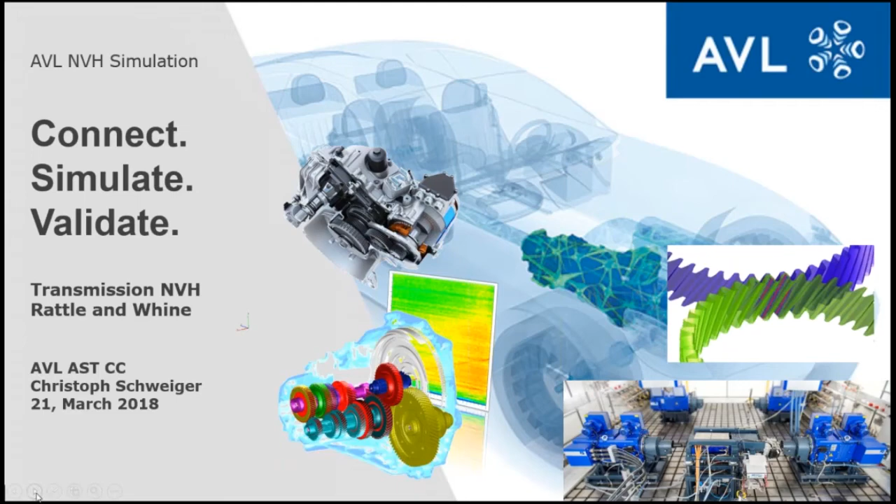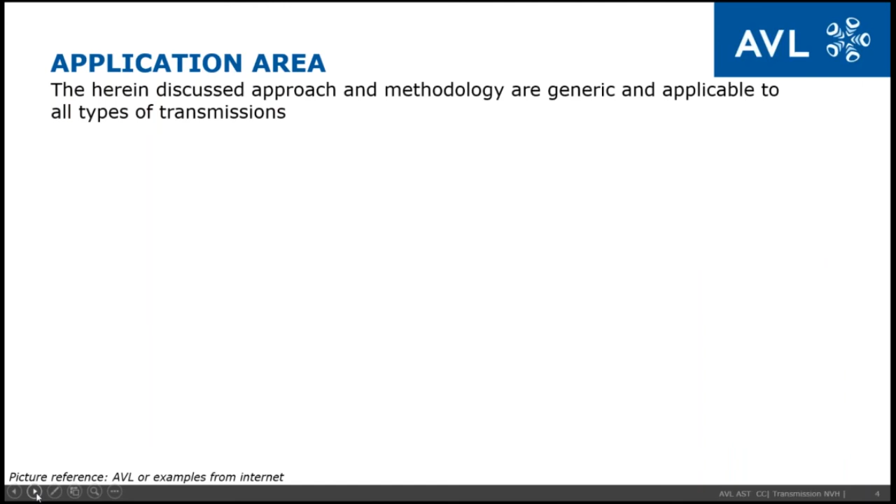Yeah, thank you very much, Gary. Very welcome to all of you participating in the webinar. The first topic, as Gary already said, will be about transmission NVH, where we especially focus on gear rattle and gear whine as one of the most important gear noises in transmissions.

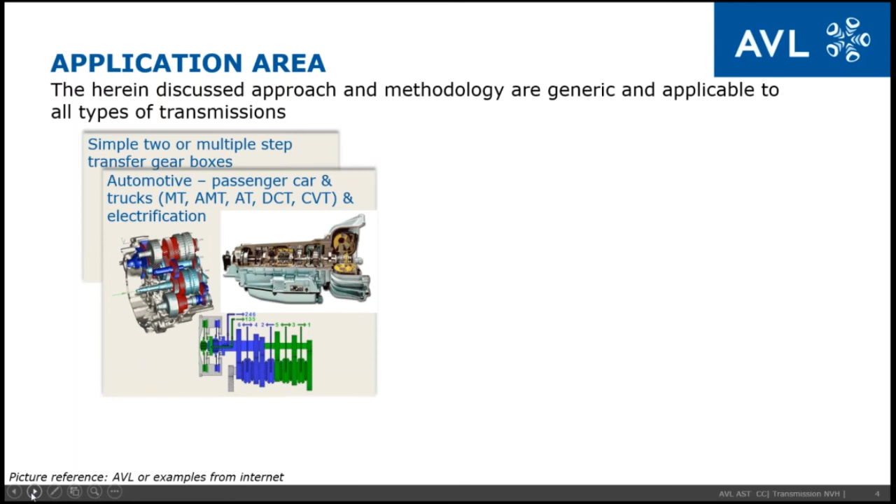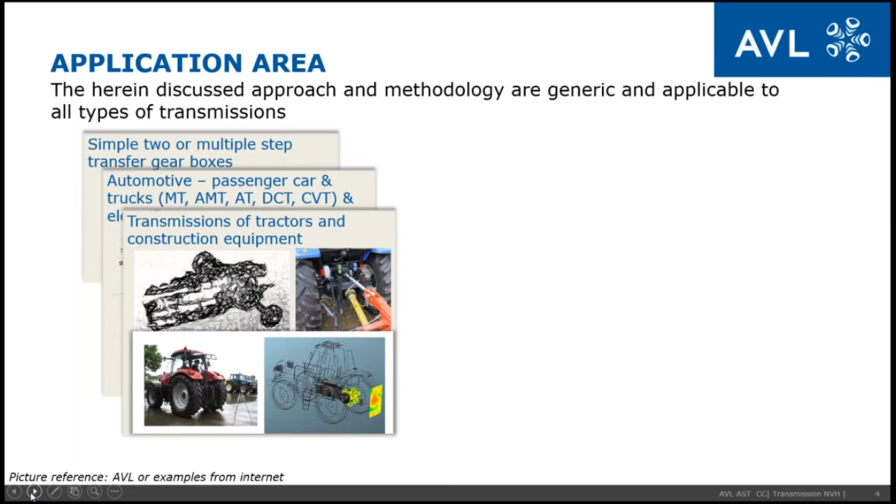First of all, I want to just sketch the application area, what we can use, what we can deal with. It depends - we have one methodology which can be applied to different types of transmissions. This can be rather simple transmissions, automotive transmissions for sure. It can be manual transmission, automatic transmission, double clutch transmission, continuously variable transmissions.

And for sure, electrification as well is also important. Challenging transmissions - tractor transmissions are probably one of the most complex transmissions, which we can deal with as well.

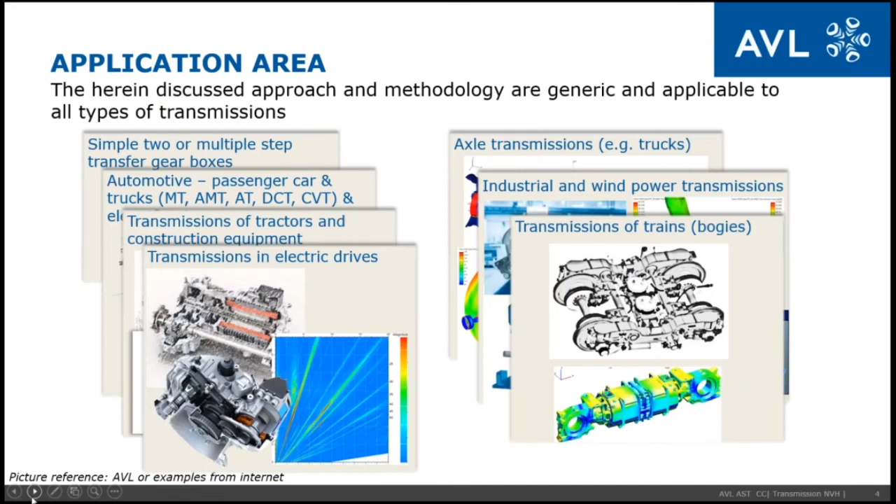Very important, upcoming, is transmission for electric drive. Especially gear whine is very important on this topic, on these transmissions, as there is less masking noise on that. But also rear axle noise - we can deal with that as well, especially gear whine orders coming out of the final drive, and also rear wheel transmissions as well.

But not only automotive applications can be covered with our approach. It can be also industrial transmissions, like in wind turbines, in, for example, grinding mills - very heavy industrial transmissions.

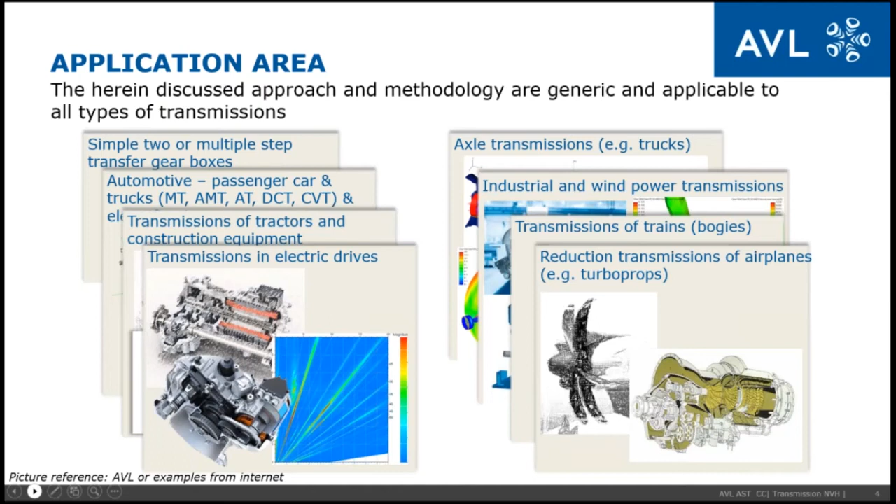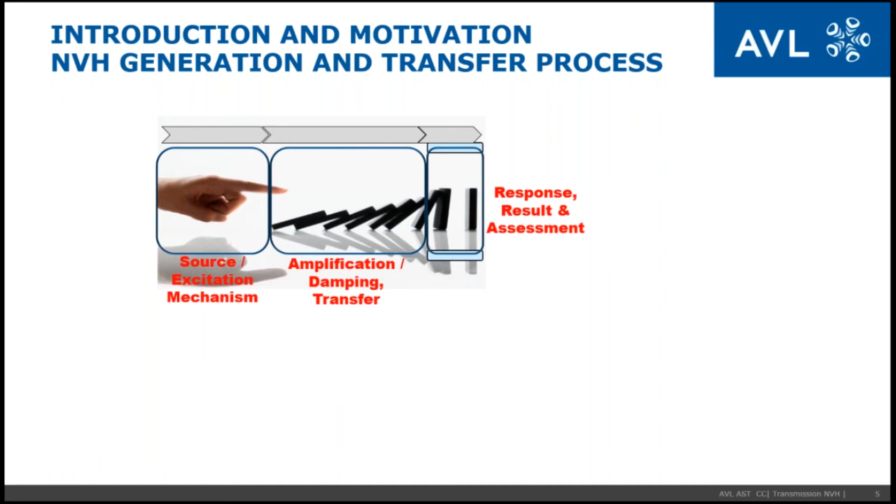Also trains can be covered. Train bogies, there are also transmissions coming from the electrical engine down to the wheel - noise is getting more and more important there. And last but not least, also airplane transmissions, especially coming from the turbine going to the propeller, typically very complex transmissions are necessary. Here with our approach, we can deal with all the flexibilities in the system on the housing, which is especially here very, very important.

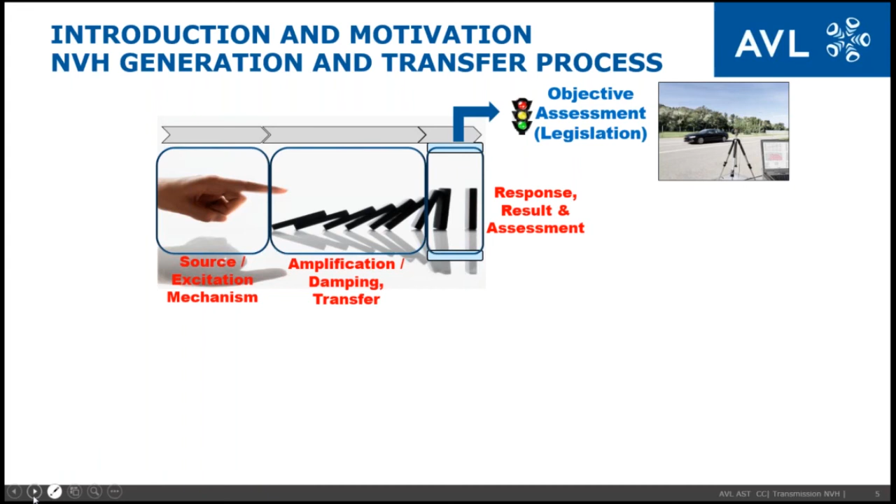But basically, that's our approach. So in the end of the day, NVH or noise starts with some kind of excitation, which we can see here. We have a variant excitation, which is typically inside the gear mesh. This needs to be transferred somehow to the housing, which excites the housing, and the housing starts vibrating, which in the end of the day results in a response, and the response is the noise we can hear - this is important for 2 points.

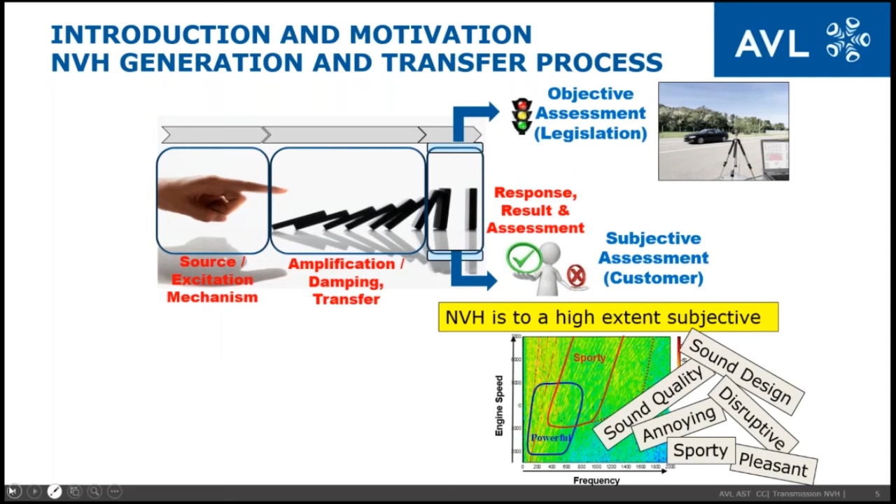It's an objective assessment for legislation, for example. So pass-by noise is getting much more important in the coming months, I would say, especially for trucks.

And the second one for sure is a subjective assessment, which goes in the direction of branding of the noise design, of the NVH design. This is a very subjective topic, and topics like sound design, quality, annoying, sporty, pleasant, subjects are placed on that and can be designed with the tool.

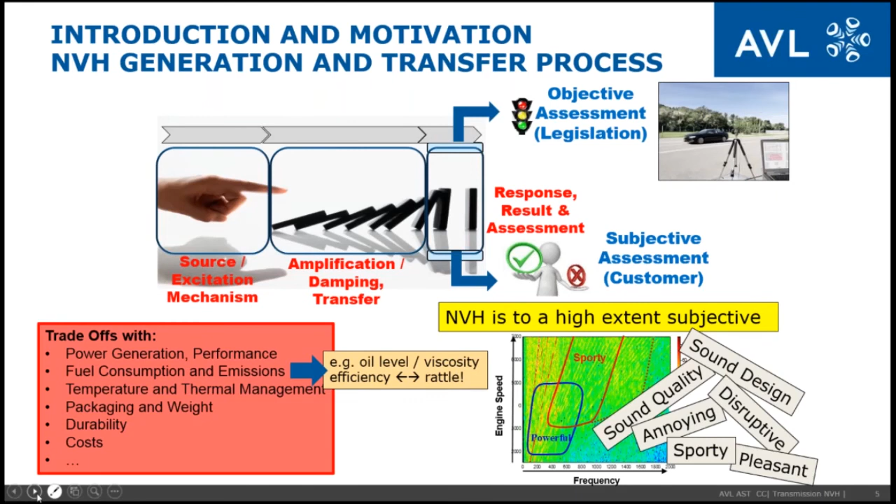For sure, there is always a certain trade-off. Nothing is for free. So when dealing with transmission, there might be trade-offs with the performance. There will be trade-offs with fuel consumption, and fuel consumption for sure is directly connected to emissions. Temperature, thermal management, big topic for sure. Packaging, weight, durability, costs.

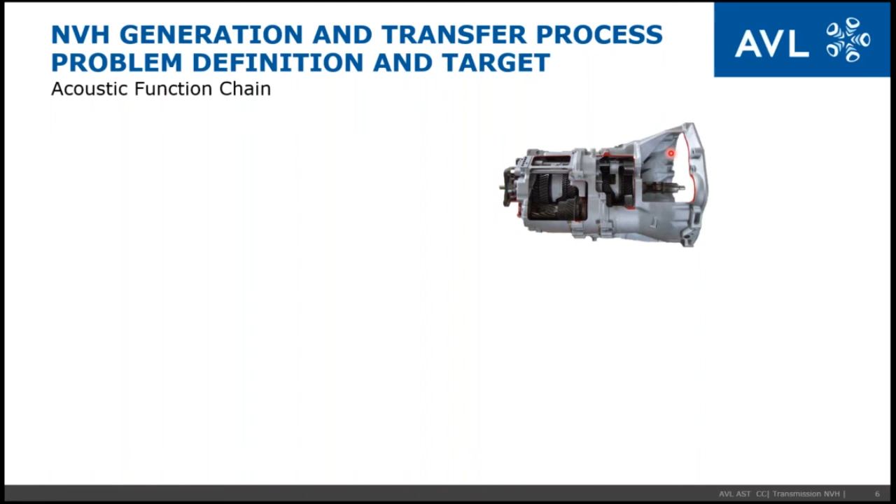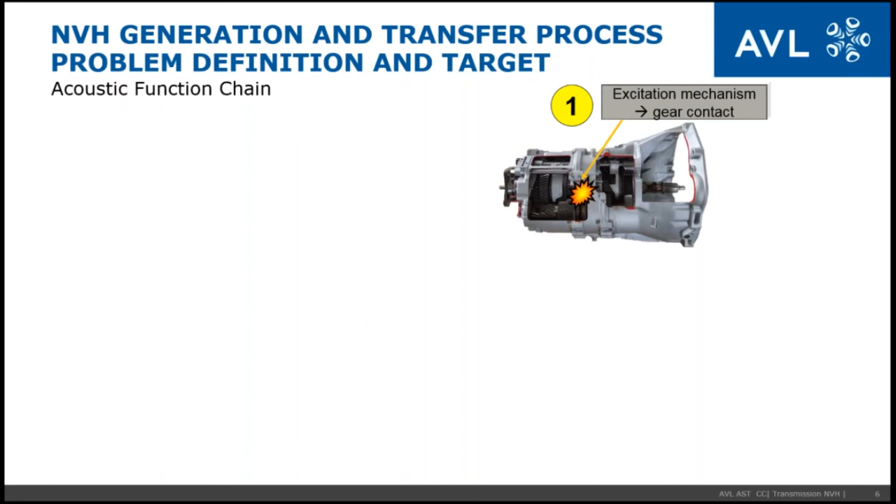Just one example to get a better picture on that: oil level is good because it reduces the rattle, and we'll come to that in more detail later. But for sure, if you have a higher oil level inside the transmission, this is very bad for the efficiency. So this is, let's say, a very clear trade-off which has to be considered and analyzed in detail with those tools.

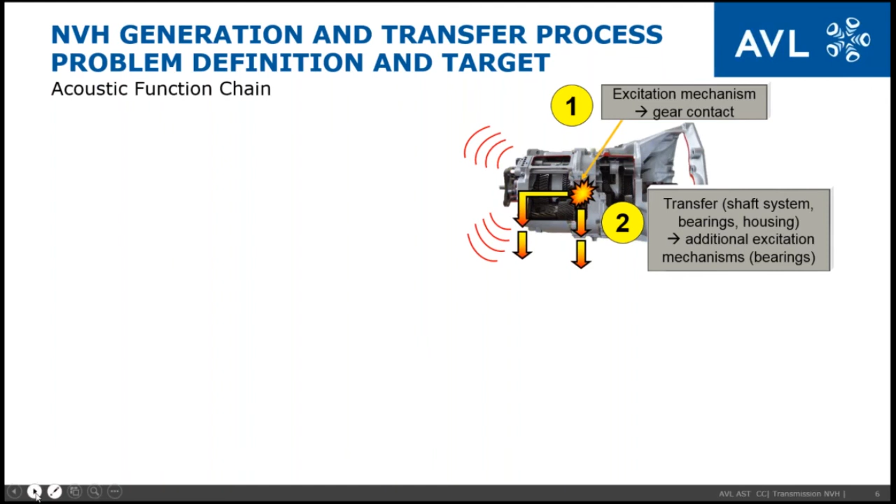So maybe a little bit less abstract. What's the acoustic function chain? So we have a gearbox here, right here. We have a housing, we have the internals, we have the gears, and we have any kind of excitation. It can be whine, can be rattle, whatever.

So it happens inside the gear mesh, and this needs to be transferred somehow to the housing, because if there is any kind of noise inside the gearbox, typically nobody cares. But the problem is it's transferred via the shafts to the bearings to the housing. So that means we have to consider also the transfer path within the simulation, including the bearings and the flexible shafts, to get the right amount of force excitation to the transmission housing.

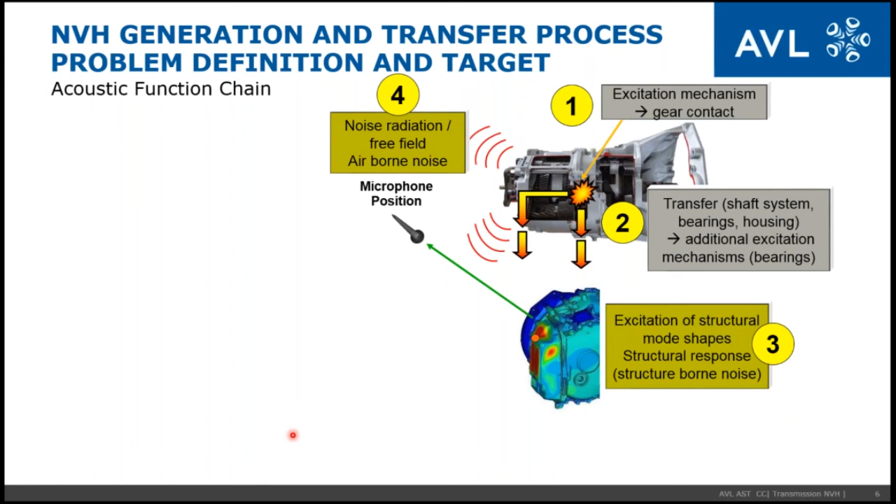For sure, these forces which are applied on the structure will excite some structural modes and give a structural response. We can see, for just this example here, we have this cover here. This is rather red, so this is a high vibrational area, which in the end radiates into the free field for the airborne noise.

And this is the fourth point, the noise radiation. So again, it's a transfer coming from the housing, from the structure to the airborne noise, which can be covered as well. Typically, acoustic assessment is somehow done based on the airborne noise.

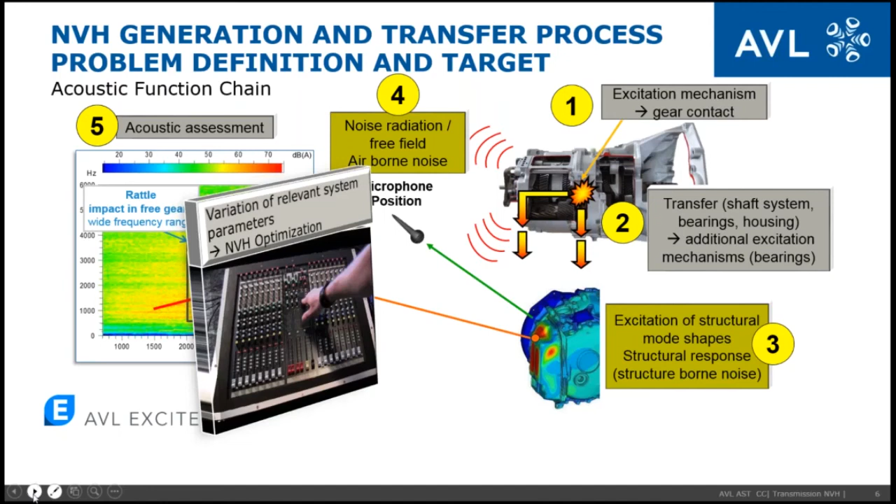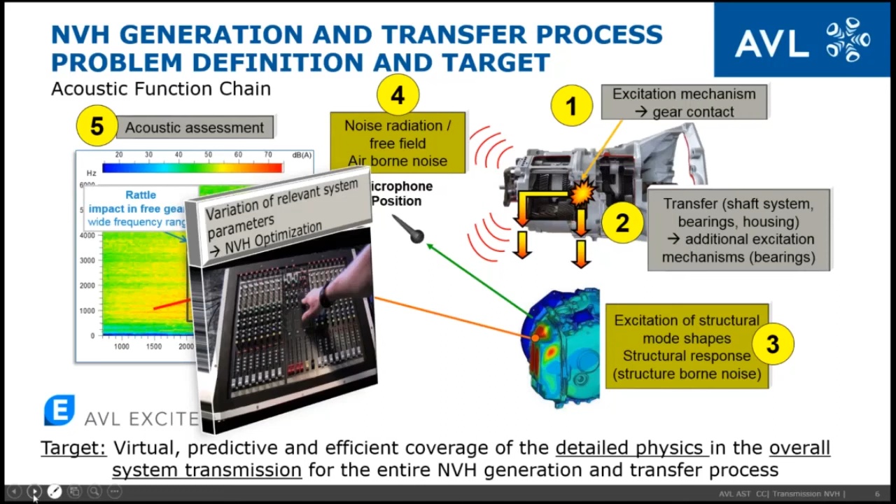Just an example here, we can see in this Campbell diagram the sound pressure level shown. Very typical for gear rattle, we can see in the lower frequency wide band excitations at certain speeds, and we have the very clear whine orders, this tonal noise of whine. It could be one order, two orders, three orders, depends on the gear mesh itself and on the transmission itself. But these are the typical results which need to be addressed and optimized in the relevant system by variation.

So you can reduce rattle with different friction or clearances or torsional vibrations, and whine with changing microgeometries and so on. In the end, there should be a predictive method which covers the detailed physics, from the excitation over the transfer to the housing, excitation of the housing, so the entire NVH generation process is covered within this approach.

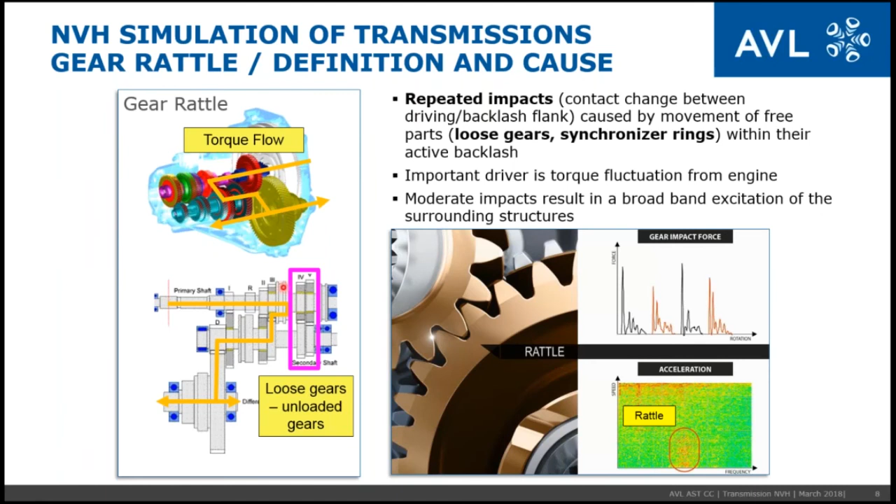I want to go a little bit into detail about the gear rattle right now. So gear rattle is repeated impacts which typically come up for loose gears. We have loose gears, they're impacting across the backlash and driving flank. It's a short and, let's say, moderate impact.

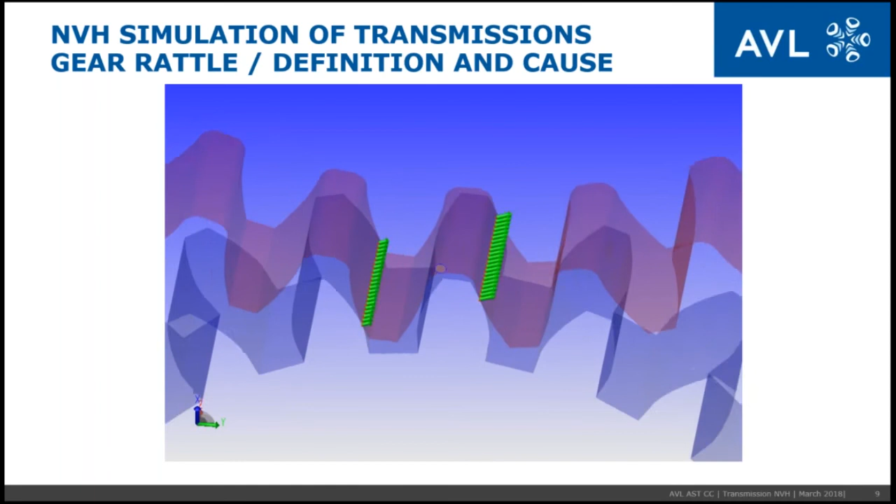What's the important driver on that? The important driver is the torque fluctuation. So we always need some kind of speed irregularity, for sure coming from IC engines. So IC engines and torque isolation is an important topic on that. And for sure we have this excitation, and in the end of the day, on the housing.

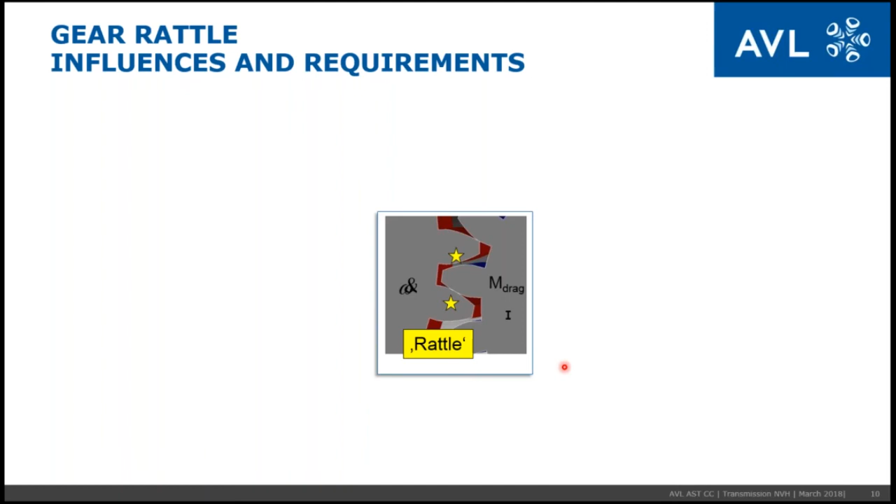You can see here just an example of how this may look like. We have the contact forces on the left side, on the driving flank, and on the right side, on the backlash flank. So we have these contact forces, and for sure this gives a certain excitation to the housing, and this is transferred to here.

A little bit more in detail, what we need for rattle is we have to have some speed irregularity. So we have an angular acceleration, and we have a drag torque and the inertia. If this goes together — if the drag torque is very large, there's always a contact on one side. If the drag torque is low and the inertia is rather high, then we come to the point that we get changing contact flanks, and these are exactly the impacts we have.

What we have to consider in detail while calculating the rattle excitation is that we need a gear contact model which really includes the backlash, to get the energy into the system. For sure, very important is damping. So there is also an EHL damping approach inside our gear model, which covers the amount of oil between the flanks.

As I already said, also important is the drag torque, and one of the most important drag torques generated, beside all bearings and seals, for sure, is the oil resistance coming out of the oil splash, which can be considered with another tool, AVL Fire, which is a 3D CFD code.

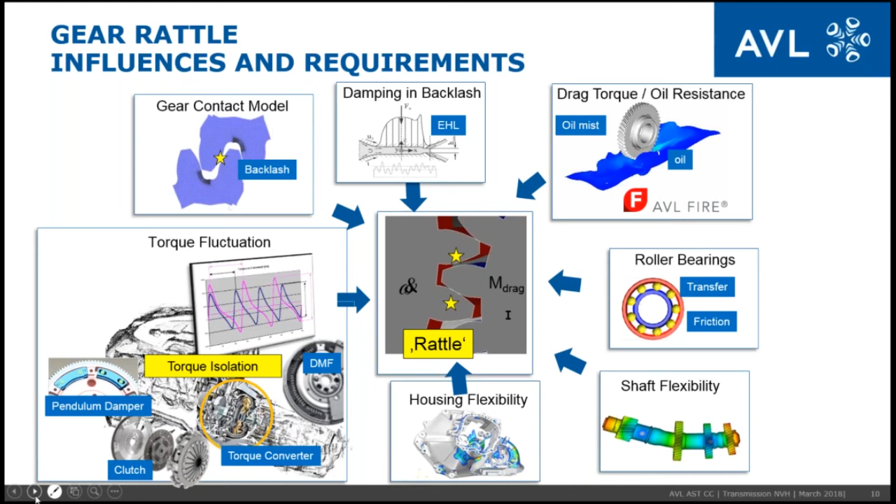On the other side, we have the torque fluctuation. Torque fluctuation comes from the combustion engine, as I already said, and there is a certain possibility to give a certain torque isolation on that. So there could be clutches, torque converters, dual mass flywheels, pendulum dampers. Basically, this is also a functionality which is inside the software.

So you can couple also the combustion engine with the transmission, calculate at the same time, and they can cover the entire angular acceleration. So there's speed irregularity at the input of the transmission as a very important source.

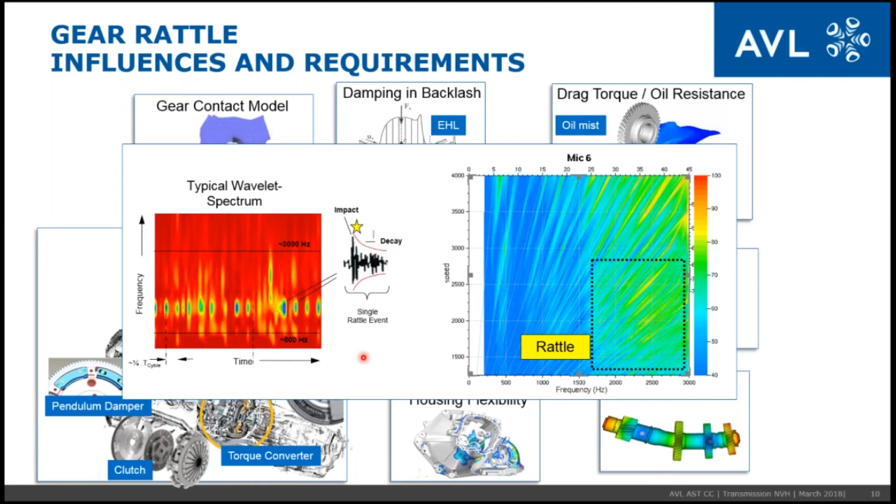Basically, with this system, with these considerations, this will end up in this typically rattle excitation or rattle response plots. You can see here that's a microphone, so it's an airborne noise result with these classically wideband excitations on the structure. And here we can see it's a typically wavelet spectrum.

So we have an impact and we have the decay, and this is a single event, and this happens all the time. Can be periodic, can be non-periodic, depends on the system. This is how a rattle looks like and how it's propagated to the housing and finally to the airborne noise.

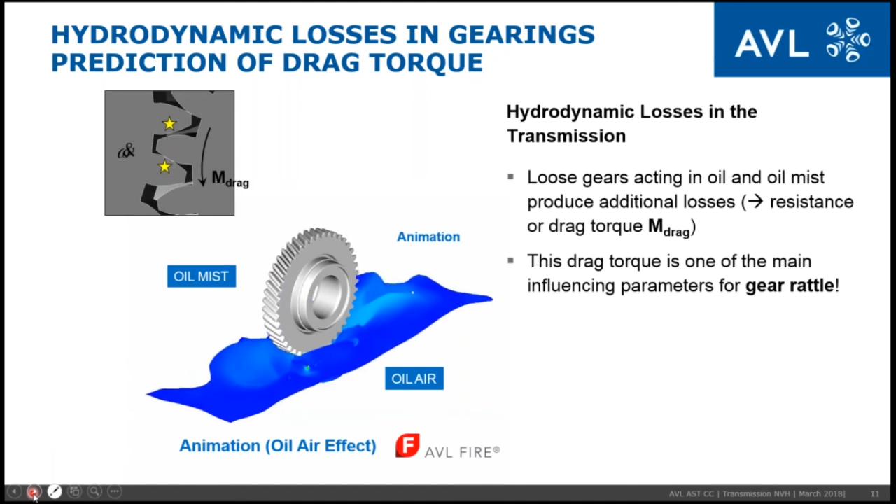I already mentioned it a little bit. One important thing is the drag torque of the loose gears acting with the oil and the oil mist to produce additional losses, and this will be added to the drag torque. This is rather important for the gear rattle, and this can be calculated in detail and used as a map. So it's not a code simulation, but a map inside the tool, which is the multi-body dynamic system to calculate the rattle.

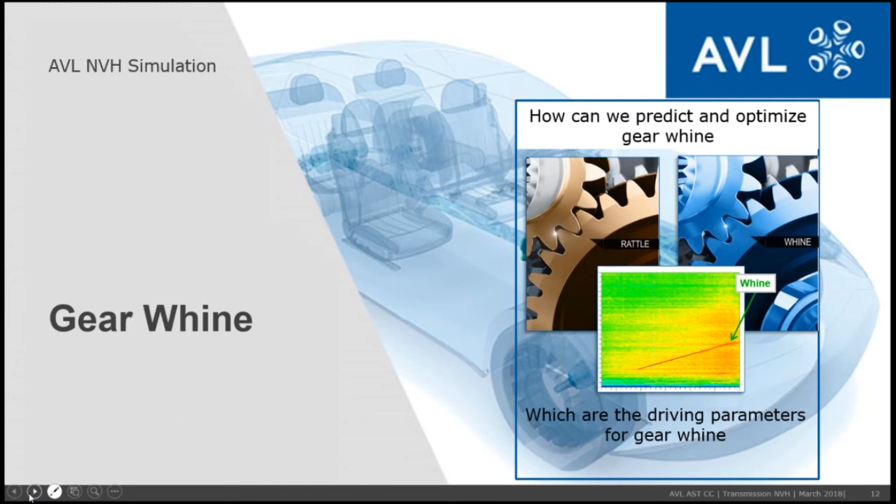The other important noise effect is the gear whine. Gear whine comes up with its tonality, which is typically quite an annoying noise. You can see it here as an example. It's just this one order going in the noise, and it's very much higher than the background noise. So it can be heard very well, and it's felt as annoying.

Basically, this comes out of periodic fluctuations in the gear mesh, basically known as transmission error. Maybe that's a little bit more clear. This may come out of geometric insufficiencies, so manufacturing inaccuracies, tolerances, runouts, shaft bending, however. And there can be elastic deflections under load, which is increasing the transmission error.

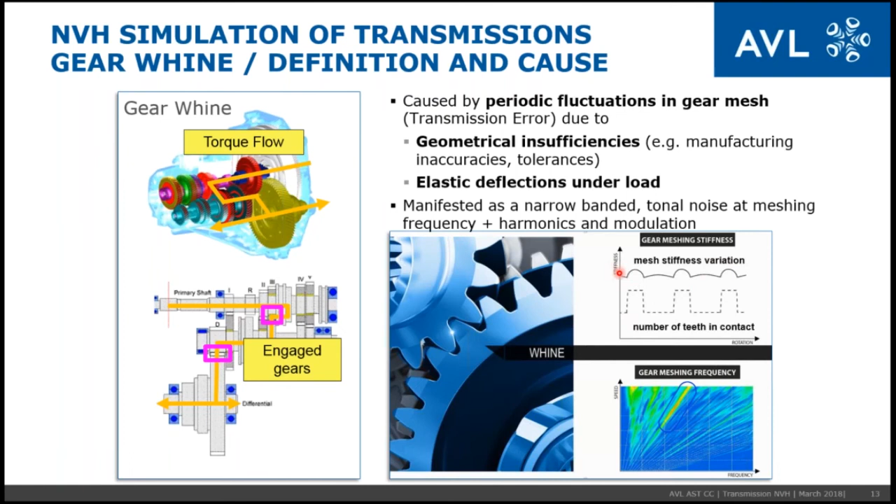And basically this comes up as a narrow-banded tonal noise at the meshing frequencies, and for sure in its harmonics and also modulations. So we can see here, just as an example, a meshing stiffness variation depending on the number of teeth in contact, and for sure this change of the stiffness exactly gives a certain excitation.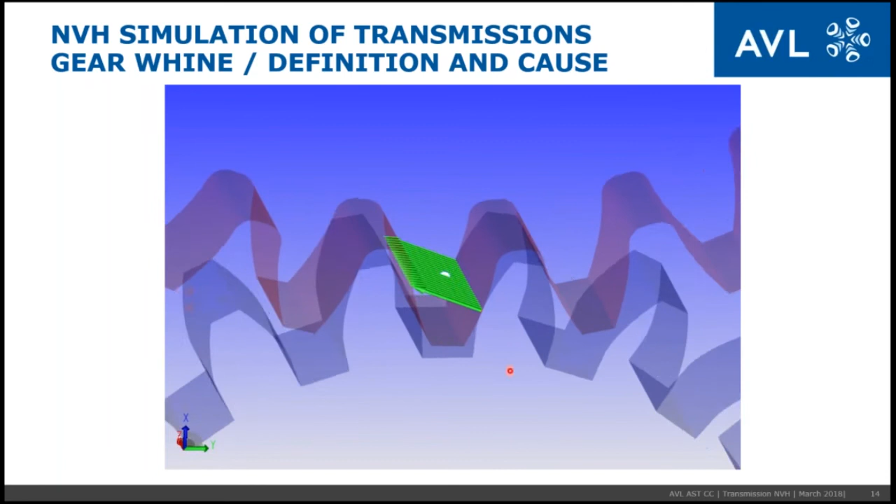You can see it here, just an example, there is an ideal rotating gear mesh, but we can easily see the different deformations, the different contact forces, and this is exactly transferred to the shafts, and the shafts transfer this again to the housing and excite the housing.

As I already said, the main root cause of this is the gear mesh itself, and it's influenced by the macrogeometry and the microgeometry of the gear mesh. That's quite important. It's caused by periodic fluctuations of the gears.

So, for example, with multiple gear contact versus single gear contact, this already gives us a certain impact on the gear stiffness. It's a variable meshing stiffness, and exactly this is what we have to consider in detail, as well as the elastic deflections under load. So we have to consider the load as well.

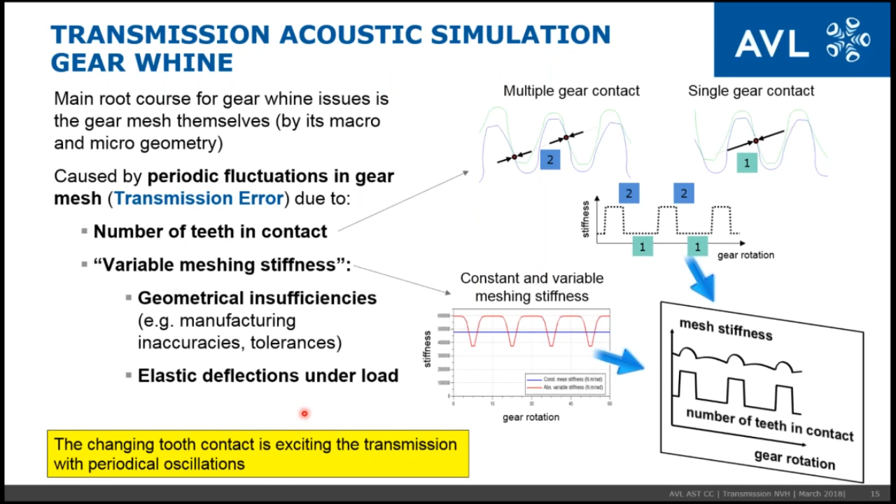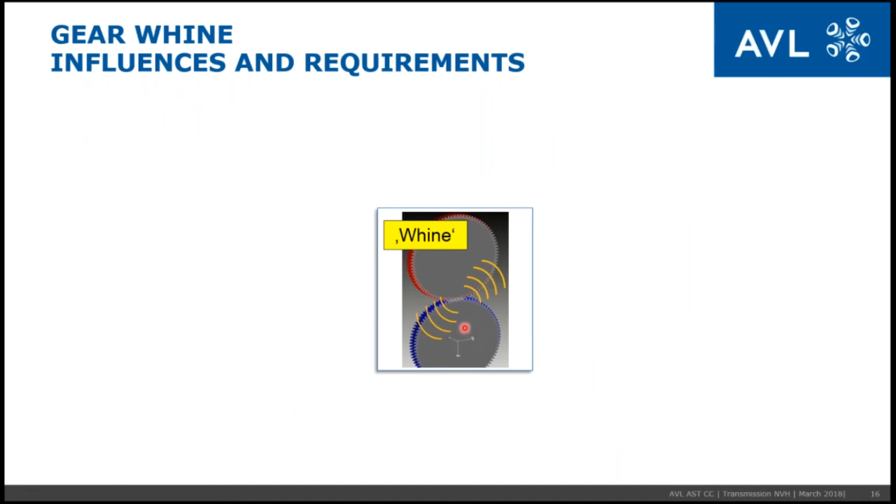What we need for whine, what we consider for the gear whine calculation: we have to calculate and consider the contact force in the gear mesh itself for the gear whine, and for this we need a 3D multi-flank contact model, which brings into contact the real profiles.

With this, we are capable to consider tooth corrections and modifications, because if we have a bended system, a flexible shaft under load, we will have certain inclinations, and together with tooth corrections and modifications, we can reduce the change of the stiffness and the change of the impact forces, the contact forces, which reduces whine.

The transfer path going through the shafts, through the bearing, to the housing is covered again in a similar way. It's the same model, so we can calculate gear rattle and gear whine in the same model at the same time. We can consider the change of backlash and the change of the contact point because of misaligned or inclined shafts.

Just an example how this may look like. We have here a certain edge loading because of a bending of a shaft. We can see we have a very high change of the forces right here on the edge. With a certain lead crowning, already this effect can be reduced, and this is shown here.

In addition to that, we can consider a full flexible gear wheel body as well, based on FEM bodies. So if you have a very sophisticated gear wheel design, which is typically not covered, this can be used as a FEM body as well. So there is more or less no limit on the design of the gear wheel to predict the stiffness of the gear as well as the transfer path from the gear to the gear shaft.

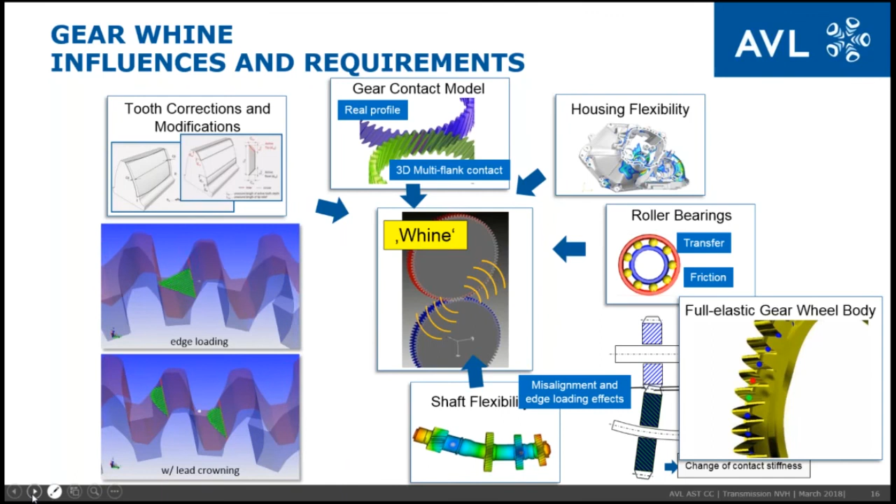We also can see the modulated frequencies, so 36th order minus second order plus second order, which comes out of the torque variation. Those are the sidebands we are generating. So this is already inside the model.

If we go for sound radiation on that, you can see on the input power very clearly this whine order of this gear mesh. And this is also visible as a response on the microphone positions, very good, and in the 3D field it shows very well. It's a very tonal noise. There is almost no covering of the background noise, so this is really annoying, and you can see the impact of the gear whine directly here in this field.

So that's the airborne noise. The sound pressure level can be indicated on that, and this is really a huge difference, and this is what describes the tonality of this system.

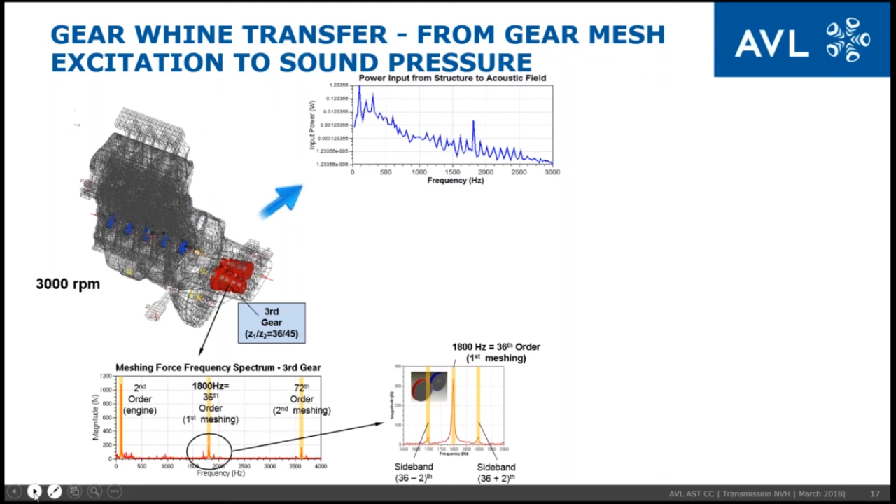Just one more example with the entire chain, going really from considering the gear mesh up to the microphones.

There is also a possibility to define an arbitrary variable contact stiffness instead of calculating it internally based on the gear mesh itself. It's just another type of definition, but sometimes this could be useful.

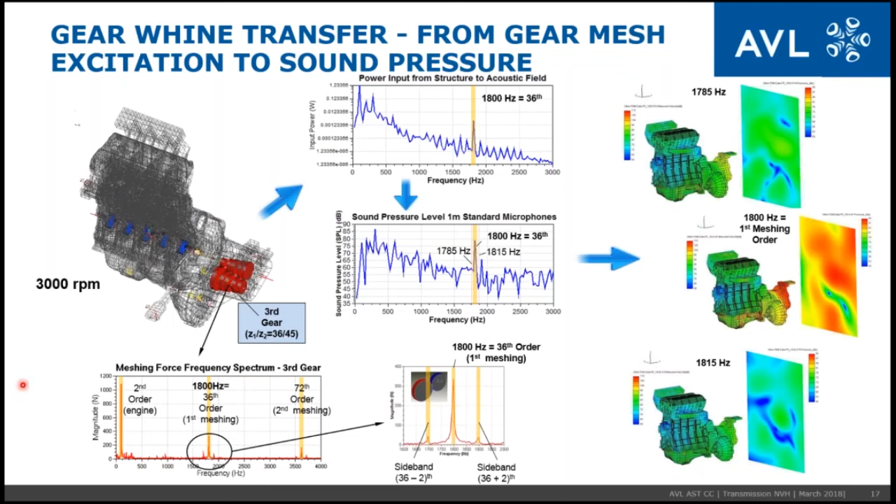What's the impact? The question is, what's the impact of the change of stiffness? So we have here a base stiffness having a certain change of the stiffness, a variable contact stiffness, and we have a modified stiffness, however this is done. And the question is, what's the impact of this to the airborne noise?

You can evaluate this in bearing forces, and for sure this can be seen, but sometimes it's a little bit difficult to judge. Is 18 newtons bad, or is it already good? Going up to the airborne noise, this tells you absolute values.

The increase or the change, the influence of this contact stiffness gives you, in the whine order, 6 dB, which can be seen here in this frequency plot, in this order plot, and also in the Campbell diagram. We can see here there is a huge, much higher amplitude than here, and 6 dB is already a number. There is a certain feeling available for what this really means.

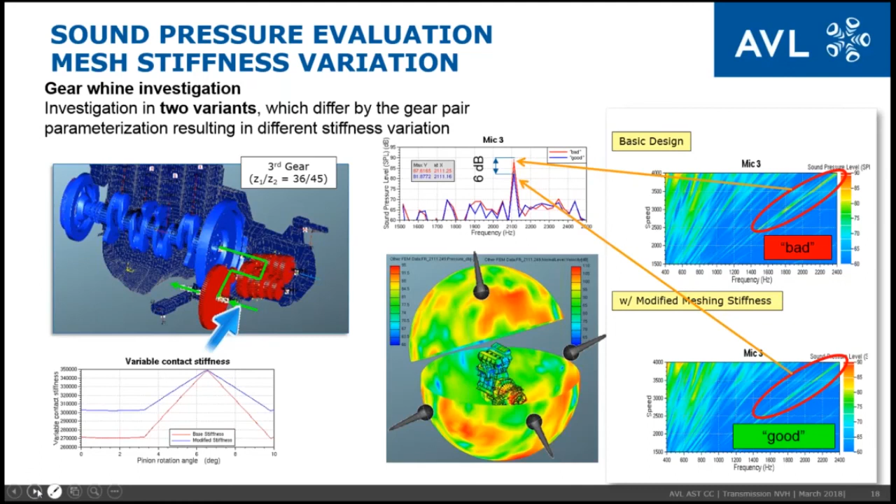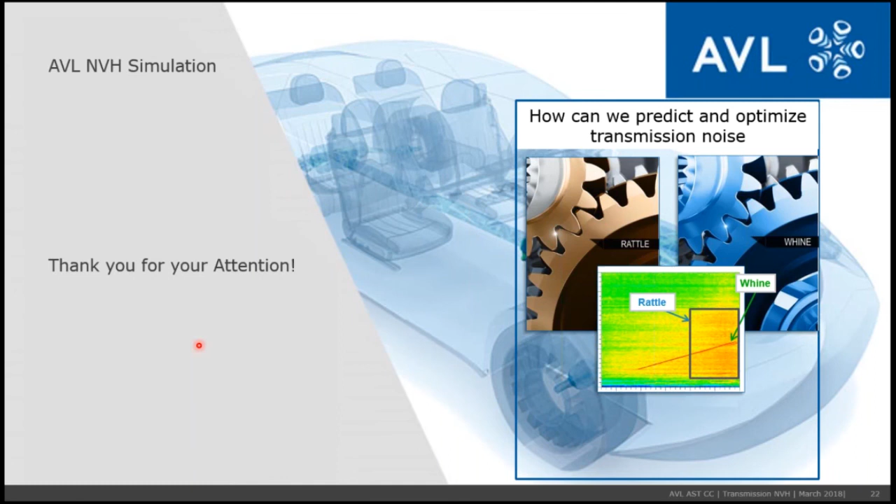Yes, thank you, Gary, for the introduction, and Christoph for the excellent presentation. So now, if everybody can see my screen, I will go with the presentation about transmission efficiency simulation. In the first part of this presentation, I will give a short introduction about different simulation topics in transmission efficiency simulation.

And the overall process in powertrain development. Then we will go into the topic with detailed explanation of how transmission friction and other losses are considered in simulation tools. And finally, I will show one case study of how we used transmission efficiency results in a real process and real project.

So when we are talking about simulation methodology in vehicle development, we can distinguish two different groups of simulation tools. The first ones are simulation tools used for system calculation, and those tools are dealing with very high complexity level, so that we have all parts and all components of the complex vehicle included in this simulation, of course with some simplifications which are necessary in this case.

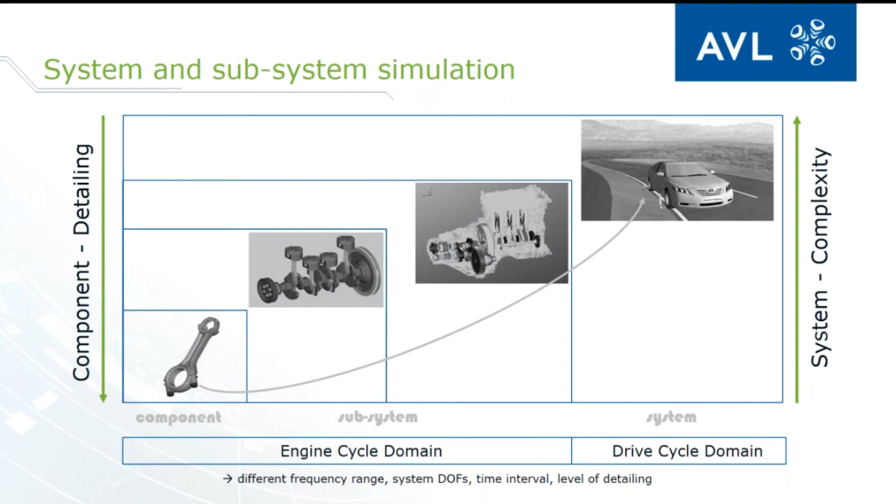If we want to look at the details of where friction losses are generated, we go in the opposite direction, from the drive cycle domain to the component domain, where we use complex mathematical models to predict the local behavior like deformation, flow, and failure mechanisms of different components and also different subsystems.

In the current approach, these two approaches are quite uncoupled and not well connected in the whole development process. So our intention in this work is to avoid this isolation between the two simulation methodologies and to make coupling as much as possible between these two approaches.

If you look at the same simulation tools, but from the view of a development process, illustrated here as a classical V process, we are starting with office simulation, looking first at the system design, then going into details with component design, and finally going with real hardware development and full system integration.

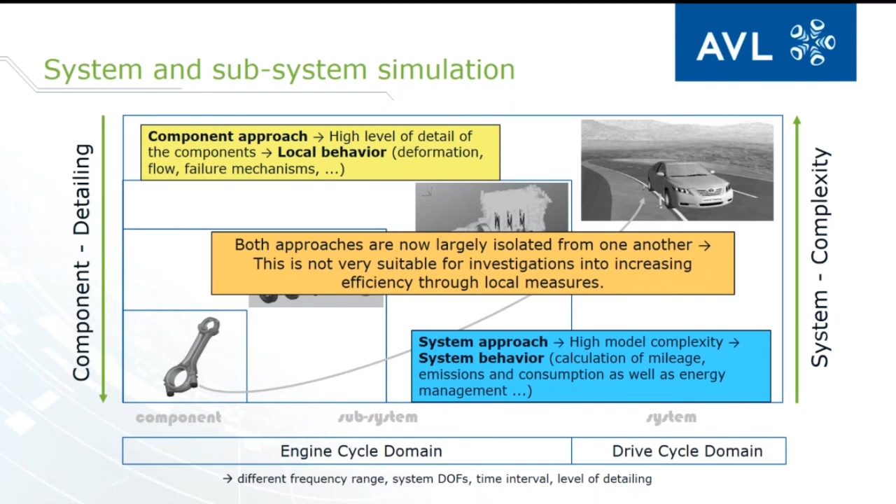When we look at the left branch of the V process, we don't want to just sequentially execute different tasks in this process, but we want system tools to use results from subsystem simulation to improve accuracy and reliability of these results.

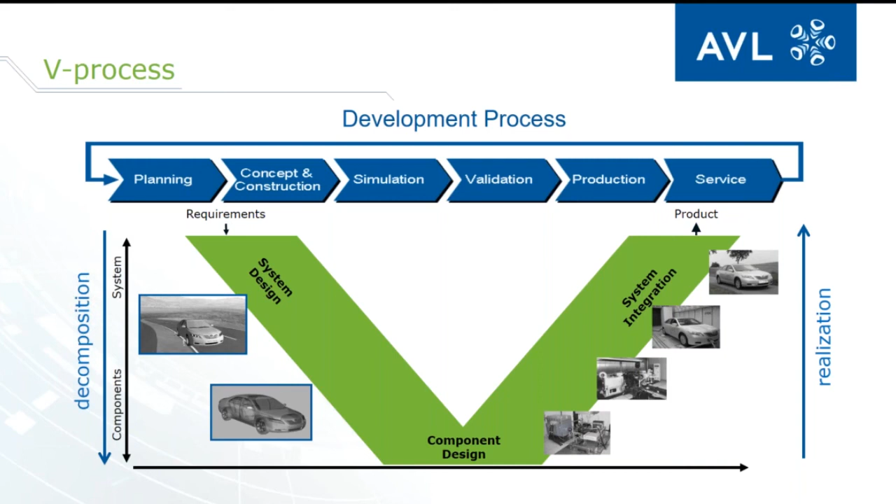This is especially important when we go to the right side of the V process, where we couple the simulation tools with real hardware, whether it is with the hardware-in-the-loop approach or software-in-the-loop approach, and where we need really accurate system simulation.

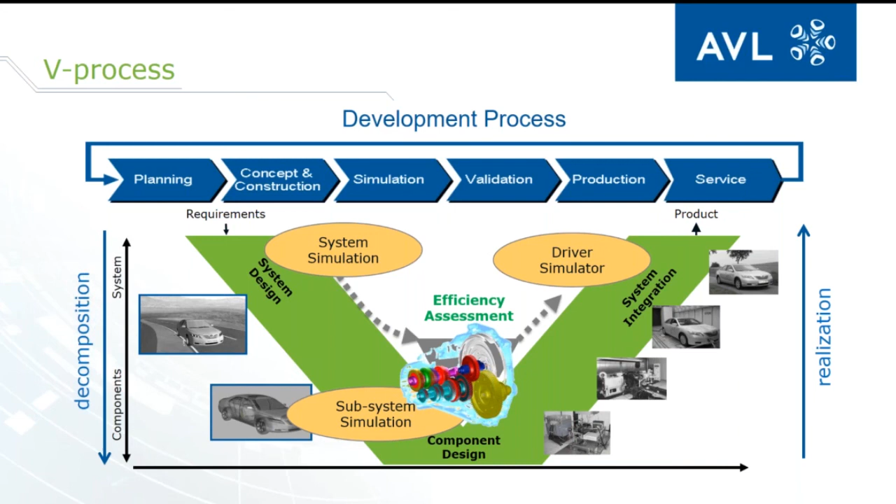Going then for the overall efficiency prediction of a complete vehicle, we for sure need to consider also friction which is generated in the engine, classically in the internal combustion engine. If you look at the results of a friction strip-down test, we can see that the majority of mechanical friction losses is generated by lubricated contacts: 30% of them is generated by the piston group, 25% by the crankshaft main bearings, as illustrated here.

To accurately consider this in simulation, we developed an advanced approach in multi-body simulation with a detailed elastohydrodynamic contact model, which considers fully mixed lubrication conditions. This mathematical model can be used for analyzing piston-to-liner contact issues, sliding conditions in slider bearings, as well as contact conditions in axial thrust bearings.

Next, in conventional transmissions, hybrid transmissions, or even just in electrified powertrains, we have the transmission as a main source of power losses. If you look at the power losses in the transmission, we can divide them into two main groups. The first one, shown here in the blue square, is the mechanical losses in the transmission.

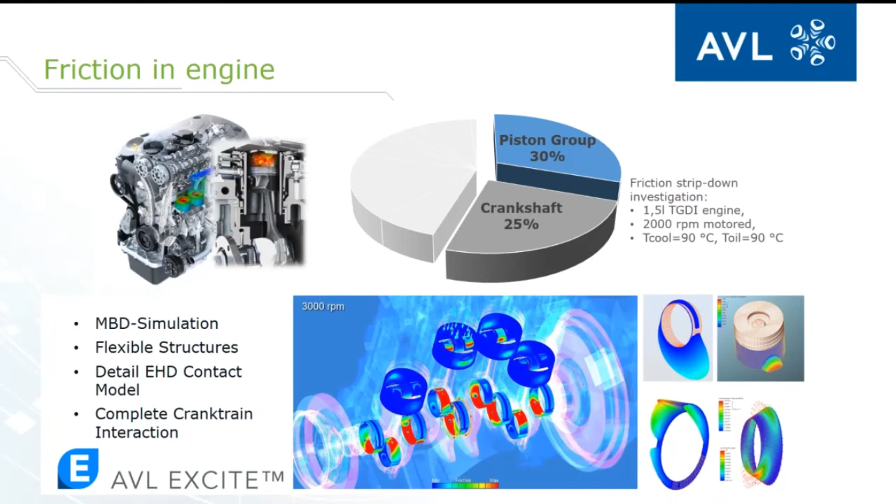When we look at the mechanical losses, different mechanical components generate friction losses like gears, bearings, clutches, oil pumps, sealings, or synchronizers, and all those losses can be included in a simulation model by a simplified approach or an advanced approach, which is also included in our simulation tool, AVL EXCITE.

The other group of losses comes from the oil, from the lubrication fluid in the transmission, and those losses can also be simulated and accurately predicted using classical CFD methods.

Finally, all losses can be summed up in friction maps, and those maps can be used later on in system simulations for overall vehicle efficiency and CO2 emission prediction.

The classical approach to consider friction in gear mesh is based on predefined friction coefficients. To go beyond this classical approach, we introduced in this multi-body simulation also a simplified elastohydrodynamic lubrication theory and mathematical model, which considers simultaneously during the whole simulation lubricant viscosity, lubricant entraining and curvature situation on the gear flanks, and also flank surface roughness.

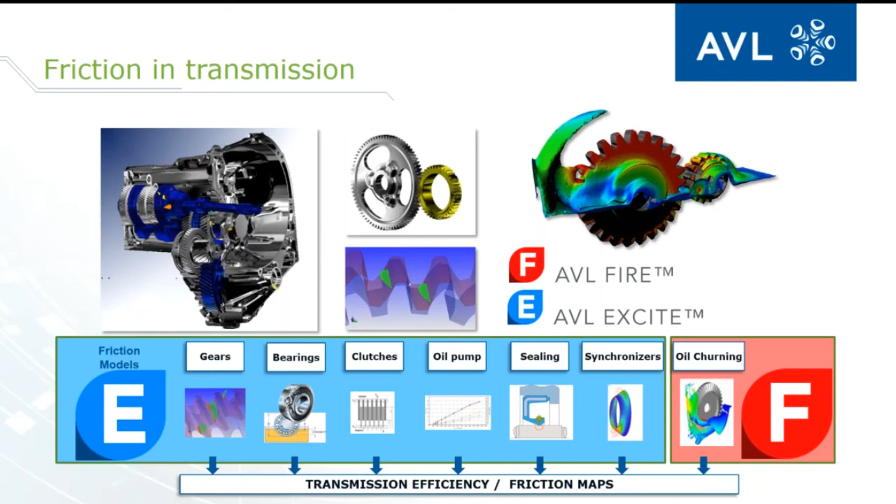The result of this mathematical model is continuously accumulated friction loss, which depends on local contact conditions in gears, like distribution of normal forces along the gear flank, and also the changing sign of sliding velocity, considering friction forces which are generated locally in this contact model.

The next characteristic group of mechanical friction losses in transmission, or components which generate mechanical friction losses, are roller bearings, which are widely used in transmissions. So we implemented our own numerical model for different types of roller bearings, like ball bearings, cylindrical roller bearings, needle bearings, and tapered bearings, especially for prediction of friction generated by those roller bearings.

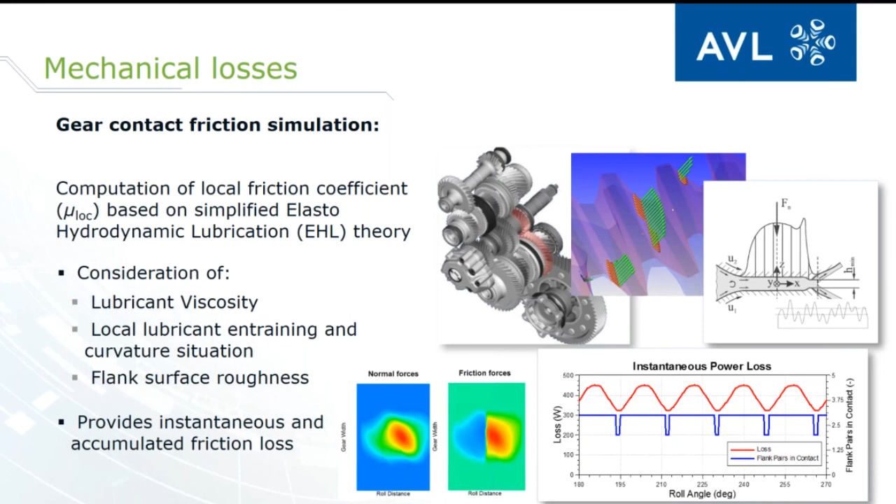So we introduced two approaches. One is a classical approach where friction torque generated by the bearing is divided into load-dependent, speed-dependent, and constant parts. We also implemented a recent friction model coming from SKF, where the friction model considers rolling resistance, sliding resistance, drag losses due to sealing, and drag losses due to oil drag.

To be open with software tools commonly used in the concept phase, we also developed interfaces for KISSsoft and KISSsys, where those models can be included in our simulation tool and used as an input for further detailed multi-body dynamic simulation.

There is also an implemented interface to a second standard design tool coming from Schaeffler Technologies Corporation, commonly known as Bearinx, where results from this detailed calculation can be included in our solution via exported lookup tables.

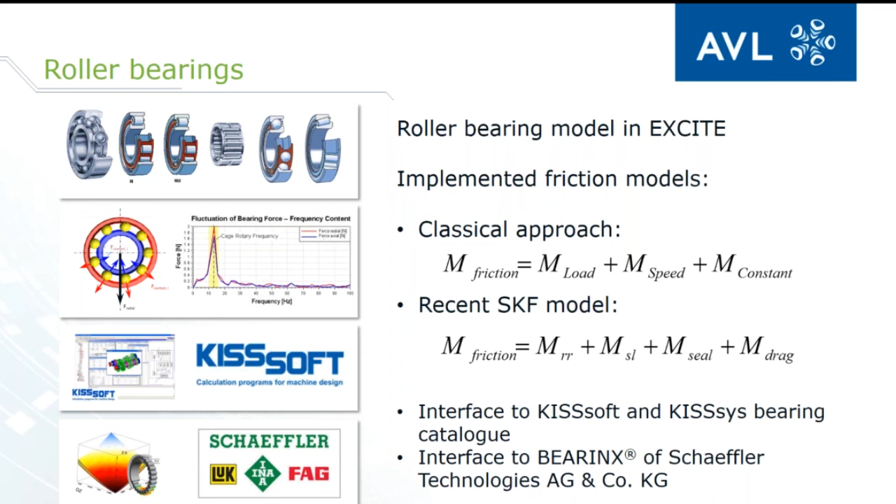For the other transmission components mentioned before, we have dedicated mathematical models which, beside other targets, also simulate friction generated in those components. For example, for the clutch, we developed a special elastoplastic friction model, where we can simulate transient phenomena during engagement or disengagement of clutch plates, including complex stick-slip effects.

During these transition periods, especially for wet clutches, we included in the simulation model calculation of drag torques, which is generated when the wet clutch is open. This model is in principle based on the standard two-phase friction model of wet clutches, but at the same time extended to also consider heat balance during oil flow between clutch plates.

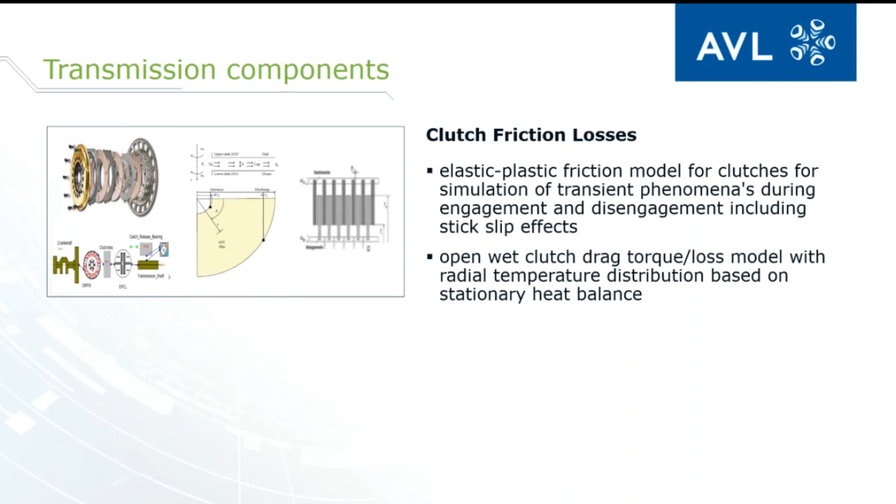Another classical component which we consider in prediction and simulation of friction inside the transmission are sealing losses, where we included in the numerical solution an analytical approach to calculate mechanical losses from rubber-type lip sealing, which takes into account the main essential influences relevant for friction, like sealing radius, radial sealing penetration or pretension, lubricant viscosity, and of course surface roughness.

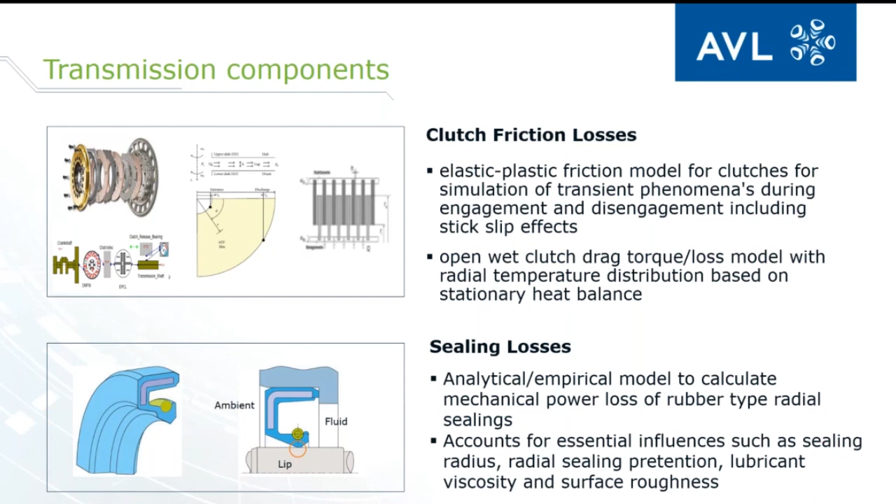The second group, as mentioned before, are hydrodynamic losses. These come from drag losses due to oil churning. For simulation of those hydrodynamic losses, we use a classical CFD approach, considering in this detailed multi-phase simulation rotational speed of gears, oil temperature, oil level, oil properties like viscosity, gear size, and other geometrical influences. This approach is well validated and gives very accurate results compared to measurements.

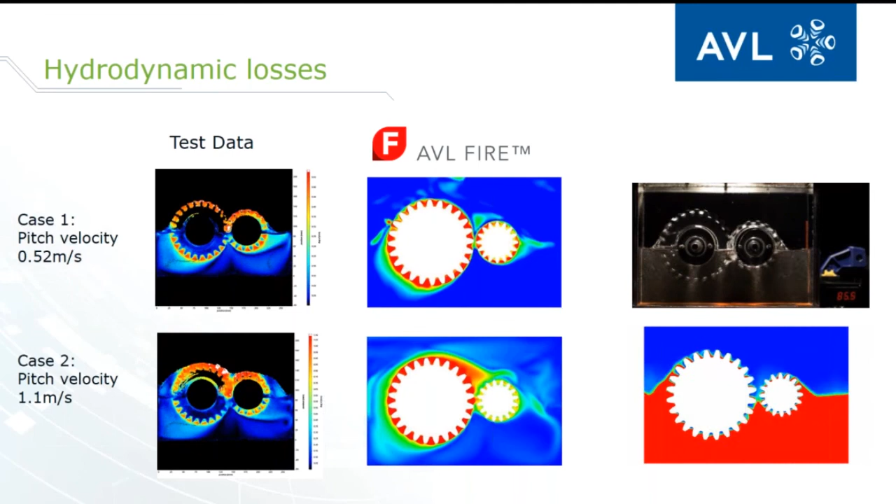In our portfolio for hydrodynamic losses, we use two approaches. One is based on our own tool available on the market, called AVL FIRE, a standard 3D computational CFD code. For simulation of transmission hydrodynamic losses we use the multi-phase approach, which offers very accurate prediction of those losses. As you can see on the left, we show the volume fraction between oil, the fluid phase, and the air phase, as a fraction of oil mist in the gear transmission open volume.

As part of our simulation portfolio, we are also the exclusive worldwide distributor for a tool called PreonLab, coming from the company FIFTY2, which uses another CFD method called smoothed particle hydrodynamics. This has advantages in CPU time needed for solving and in preparation of a model, as this numerical model doesn't need mesh preparation. Results from both approaches are in principle oil distribution, which can be used for improving oil flow inside the transmission, drag torques, shear stresses between oil and rotating components, and pressure forces.

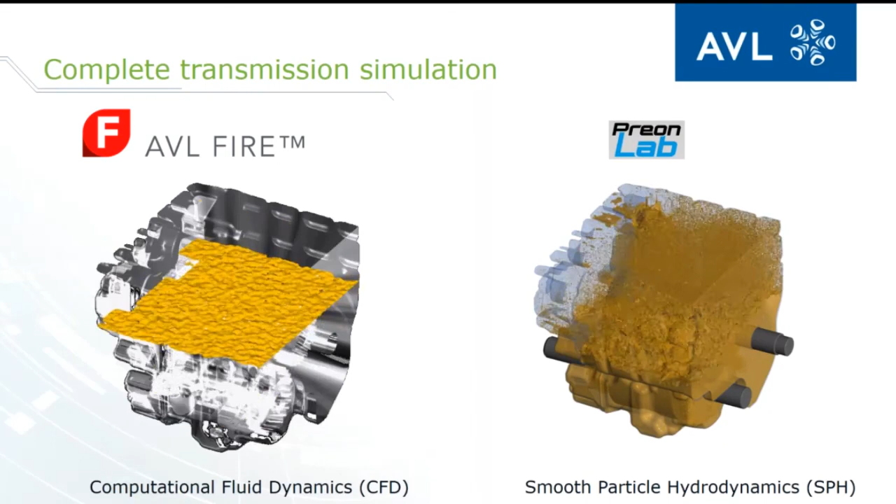Finally, we are combining all numerical models used for prediction of mechanical losses, which are part of the software solution, together with pre-calculated hydrodynamic losses, and applying those losses to the final multi-body dynamic model, which was also presented before by Christoph, to get accurate prediction needed for both rattle noise prediction and gear whine noise prediction.

As part of multi-body dynamic results, we are also getting friction maps, which can be used further in simulation on the system level. Those friction maps can be calculated for different operational conditions, speeds, and loading conditions, and exported as lookup tables for further simulation - not just for driving cycle simulation needed for efficiency and fuel consumption prediction, but also for simulation tools dedicated to thermal management simulation, as part of the application area.

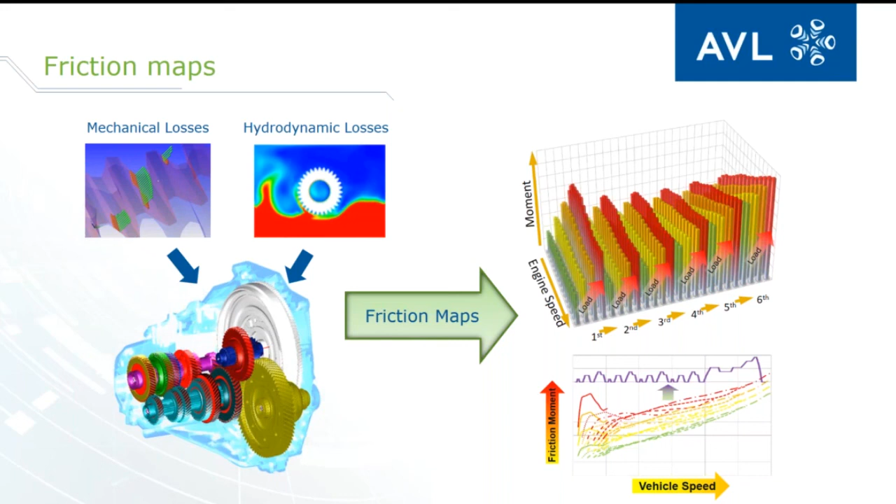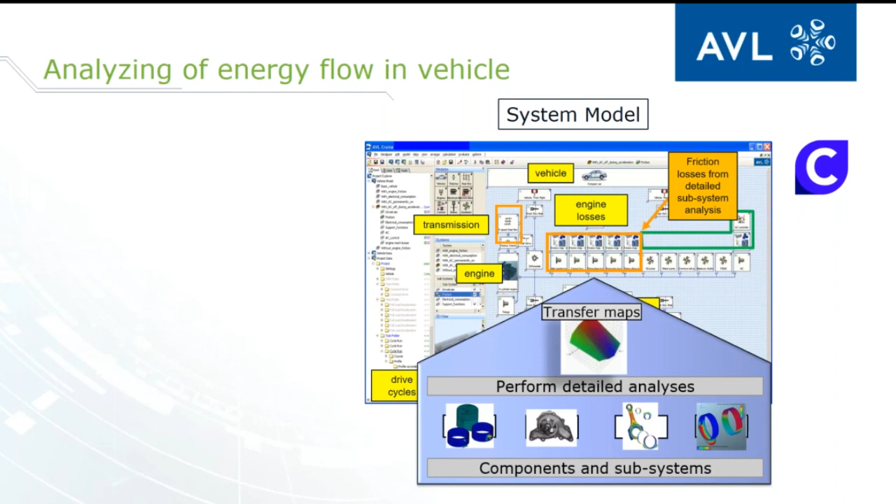Once we calculated in detail all power losses inside the powertrain, inside the engine, inside the transmission, we can include these losses in a system model. In our simulation portfolio, we are using AVL Cruise for such simulation. The friction losses can then be included in the simulation model, illustrated here for example for the engine as a single component, so we can investigate for different operation conditions what group of characteristic losses is dominant and what their contribution is, which can be summed up, as illustrated here for friction losses for the transmission, where the complete transmission is considered as one single object in this simulation tool.

As a result from this calculation, we are getting energy distribution during a driving cycle, which can be predefined or a real driving cycle, as we will illustrate in the continuation of this presentation.

What is shown here is a classical approach where the system model is an offline model and simulations are done as steady state, with only longitudinal dynamics of the vehicle considered in this simulation.

Our development now goes in a more complex direction, so that we can couple this kind of offline model also with a model which considers full vehicle dynamics, and based on this dynamic, all driving conditions beside longitudinal acceleration - also lateral and vertical dynamics - are considered. This can be simulated with a software tool dedicated for this.

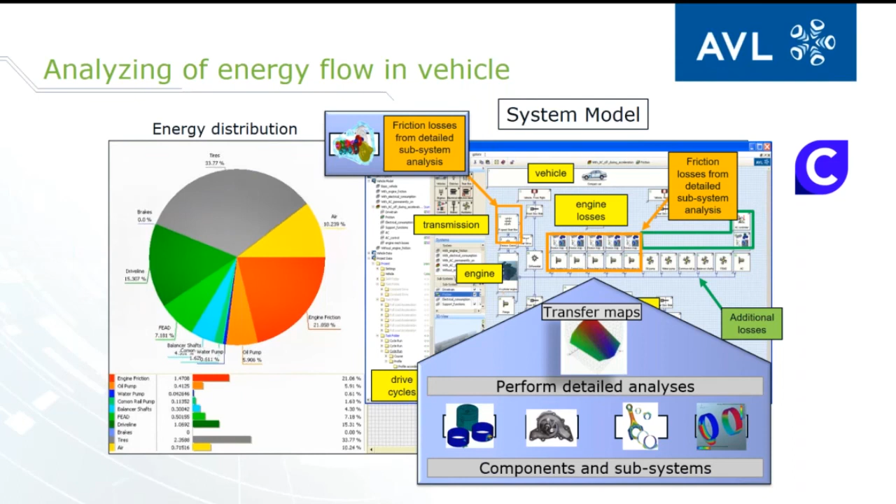What we are showing here is AVL Vehicle Simulation Manager, VSM, which works together with simulation as one coupled simulation - online coupling. This coupling is done with a special tool produced by AVL called Model Connect. This tool offers coupling of different simulation models in one co-simulation platform, which can include all possible effects important for prediction of real driving emissions.

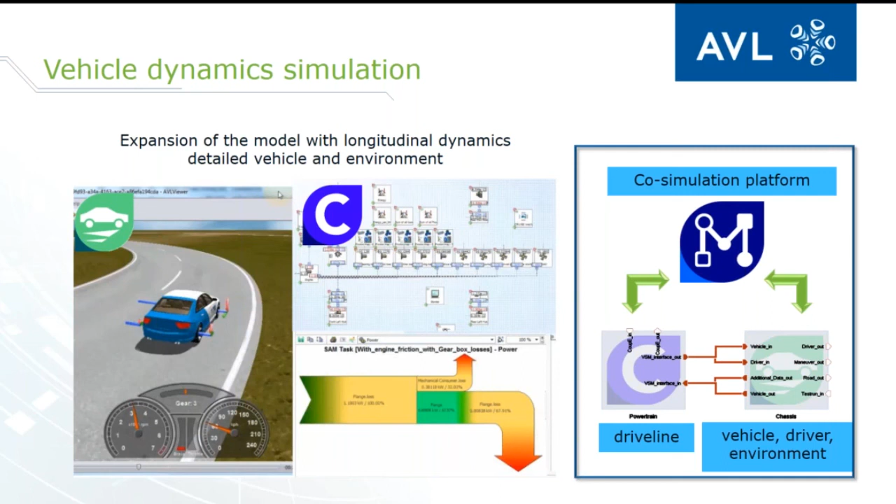What is our final target? How does it work? The coupling between different tools is not limited just to simulation methodology, so simulation tools - we can also couple hardware and put the hardware in the simulation loop. In this case, we will demonstrate how this coupling is done to include a human, the driver, in the simulation model in real time.

This kind of simulation can then be used also for prediction of driving performance and fuel consumption, energy management and efficiency improvement, drivability prediction of a vehicle, and development of automotive AD or ADAS functionality - automatic driving assistance or full automatic driving conditions.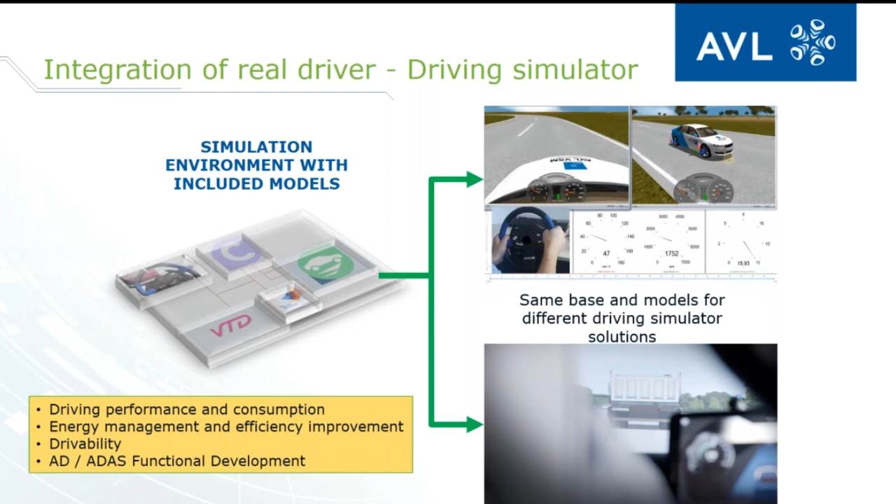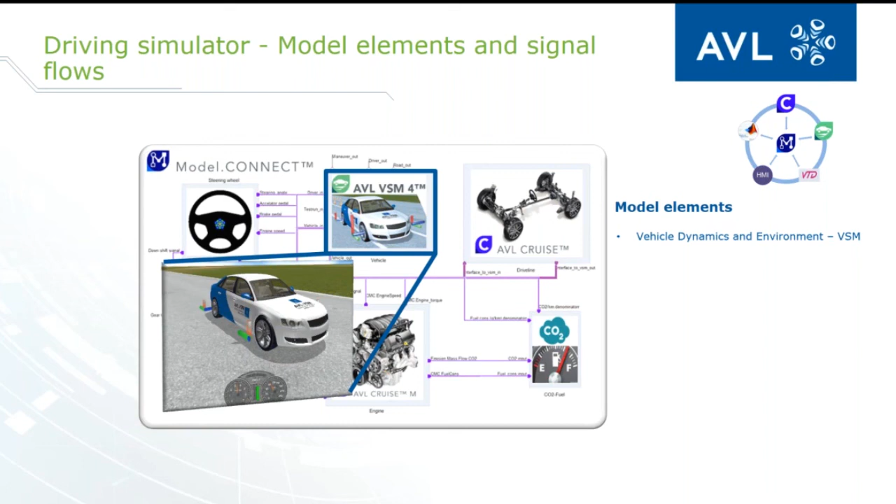The vehicle dynamics is simulated with the AVL VSM model, where full dynamics of the vehicle are considered, including road-to-tire contact, suspension forces, road profile, etc. The driveline model is created in AVL Cruise, where different components of the drivetrain are modeled with specific elements. As we are using a real-time engine model in this case, we developed a special tool called AVL Cruise M, where you can specify and build up an engine model which can also work in a real-time environment.

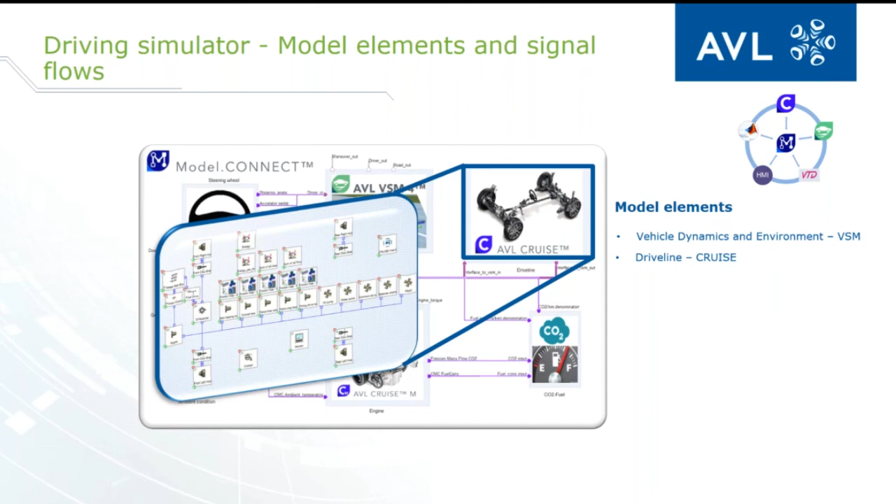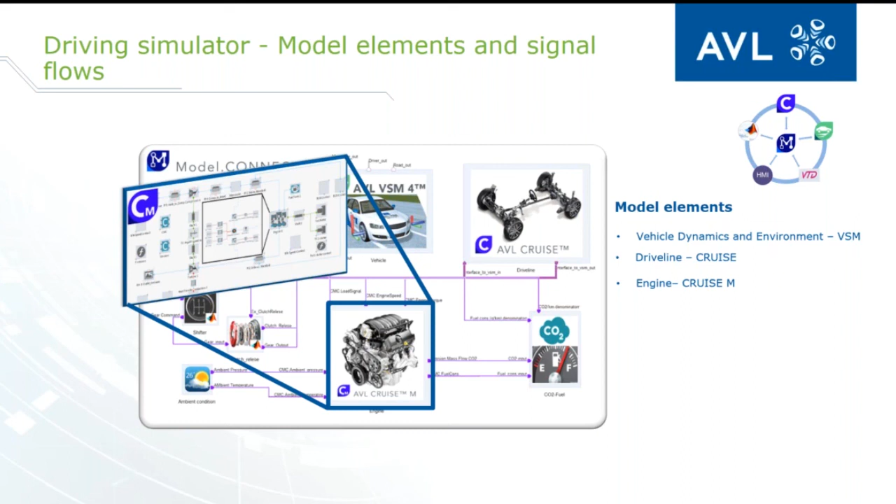We have in this case also showcased an automatic transmission model, so we included in the simulation model a gear shifting control, which is done in Simulink, and also control for clutch engagement and disengagement. Finally, we have an interface to the steering wheel, which in this case is standard Logitech gaming hardware, connected with the simulation environment using a USB interface and Python interface.

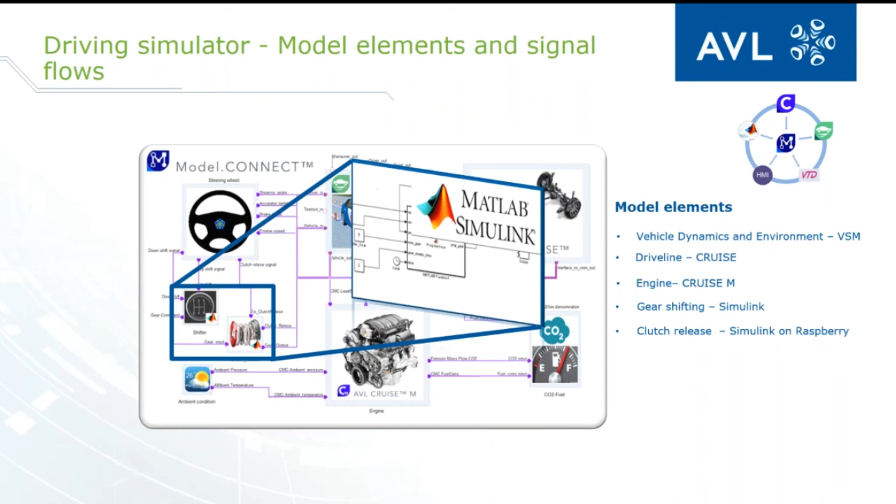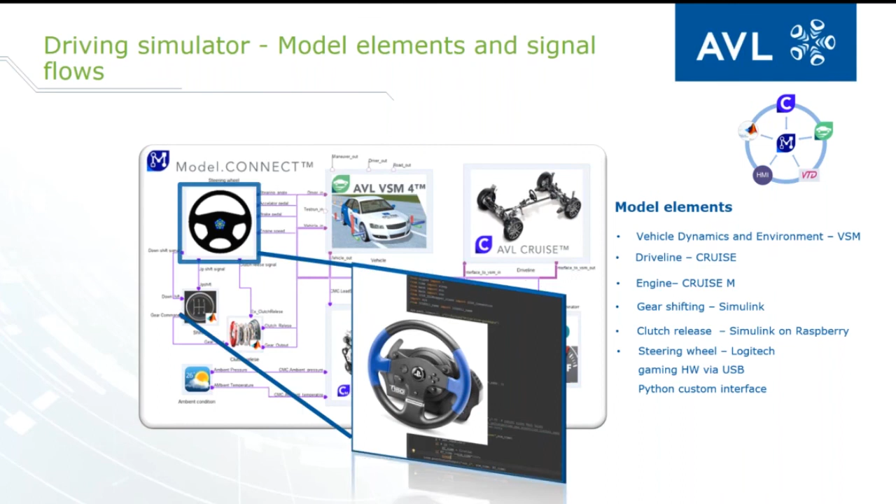All this gives us the possibility to analyze real driving conditions, as our co-simulation platform offers coupled tools working together, so different channels are exchanged between the different tools, and we can also customize visualization of all these results, as shown here in the VSM environment.

As the final results of this simulation, we recorded for this use case driving profiles for 12 different drivers, who have different driving behavior. And we can see interesting things in this case.

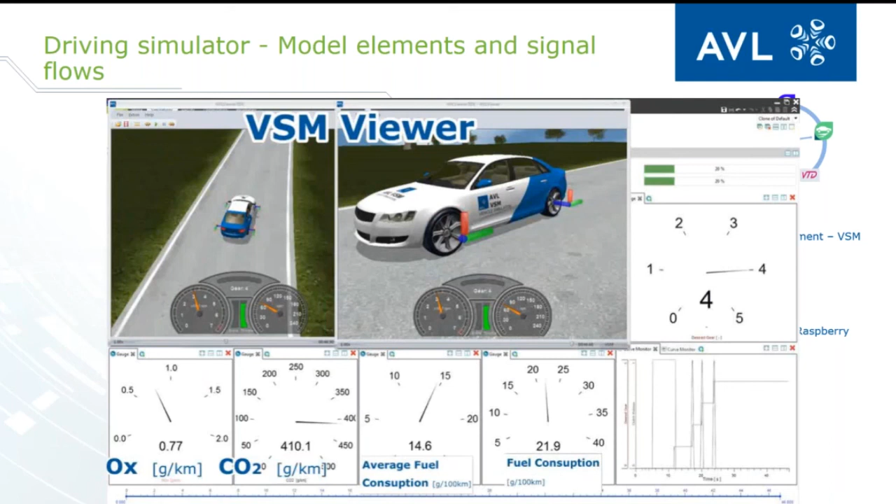Each driver has different behavior, and the most defensive drivers have the lowest average vehicle velocity. But in terms of fuel consumption, one driver achieved a superior result, achieving 37% fuel consumption reduction compared with the same driver with a different driving style, which had the same average speed.

At the same time, we can see that the driver who has the maximum fuel consumption, driver number 11, didn't achieve the maximum average vehicle velocity, which means he has a less preferable driving style, with a lot of acceleration and braking during this given, predefined route.

So that was all from my side, what I wanted to show for this moment. We will go now with the question and answer session.

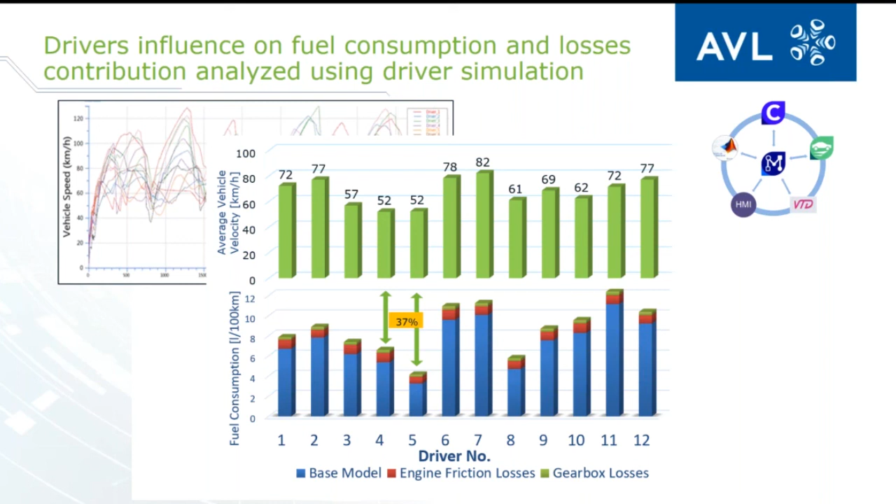Hello, we have several questions which arrived, mostly regarding NVH. So Christoph, one question is quite a good one: for gear whine optimization, typically you do this by profile modifications and corrections, but this is typically based on one, let's say, load condition. So how do you optimize this for a wider torque range, or how can this be done?

We have a possibility to connect our software, also the optimizer tool, and we have to look at different torque levels and find the best trade-off using the optimizer or DOE tools. Currently this is quite an important topic, as with upcoming regulations for trucks, pass-by noises need to run on higher torque levels. So basically, the optimization of the best or least whine noise point needs to be redone with different noise levels, but we have to focus on the entire operating range.